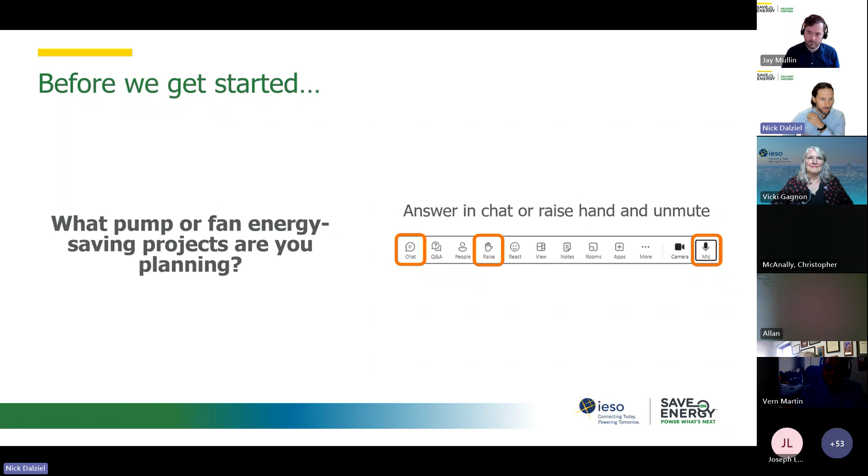As I mentioned, today's webinar is on estimating project savings. This particular webinar is focusing on pump and fan systems. My name is Nick Dalziel, I'm an energy coach at Wolfen, and I'm excited to be here talking about this. I've been working on pump and fan system energy savings since my very first job out of university, and that's actually where I met Vern Martin, a storied expert on fans, who is going to be my co-facilitator here today. I'm going to be taking us through the training portion of today's webinar, and Vern is going to lead the Q&A in the second half. Vern, do you just want to say hi?

Hey, can you hear me okay? You bet. All right, perfect. Good to be here and nice to see the group here. Is my video working okay, Nick? All of a sudden I got a thing that flashed up, said it's not working. How's it look, Jay? I can't see people's faces, it's a little bit frozen at the minute, so maybe try turning that off and back on, but the audio is fine.

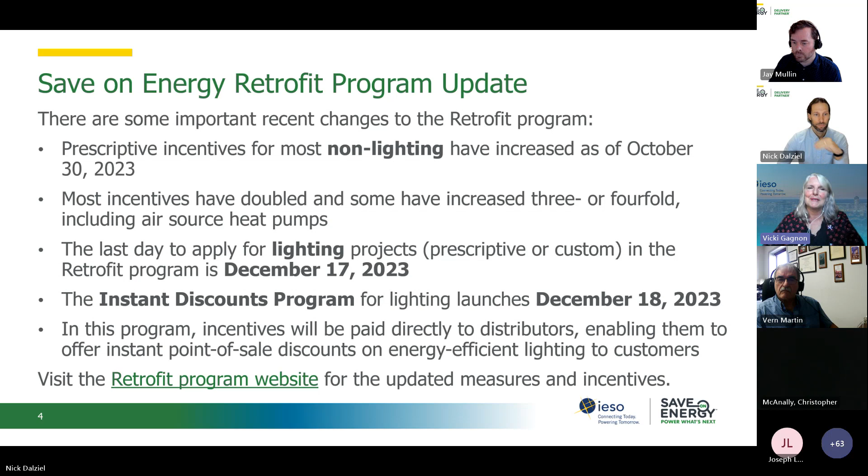And secondly, the last day to apply for lighting projects in retrofit, both prescriptive and custom track, is December 17th. And the instant discounts program for lighting launches December 18th. In that program, incentives are paid directly to distributors, enabling them to offer instant point of sale discounts on energy efficient lighting, so that you can purchase already discounted lighting from participating distributors without any paperwork on the part of the customer. You can find more information on all of these changes on the Save on Energy website. And with that, I'll turn it back over to Nick and Vern.

Great, thank you Vicki. All right, so today's webinar, the training portion, is going to follow a 3-point agenda, starting with pump and fan fundamentals, including types of pumps and fans, pump and fan curves, basic principles and equations for understanding pump and fan operation. Then we're going to move into estimating pump and fan energy baselines.

This will include some more equations for calculating power and incorporating load and duty factors when developing your energy baselines. And then we'll move into estimating pump and fan project savings, including a look at the fundamental mechanisms of savings behind these projects with pumps and fans, typical opportunities and solutions, as well as calculation pitfalls to avoid. After that, we'll move into the Q&A with Vern Martin.

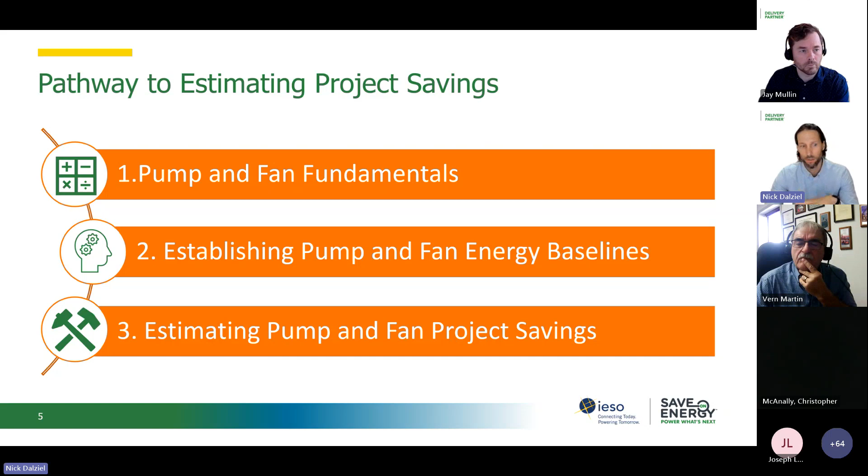Understanding some pump and fan fundamentals is critical to understanding how to calculate energy savings. The expectation of this audience is that you know these fundamentals, so this first part is intended to be a refresher and it's going to move pretty quick. The participant workbooks have additional materials and references—some of my favorite go-tos over the years—so if some of this material is new to you, please check those out.

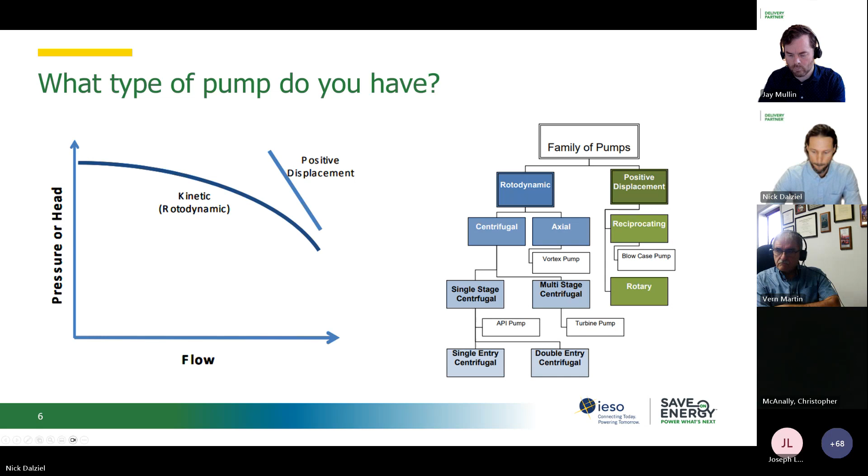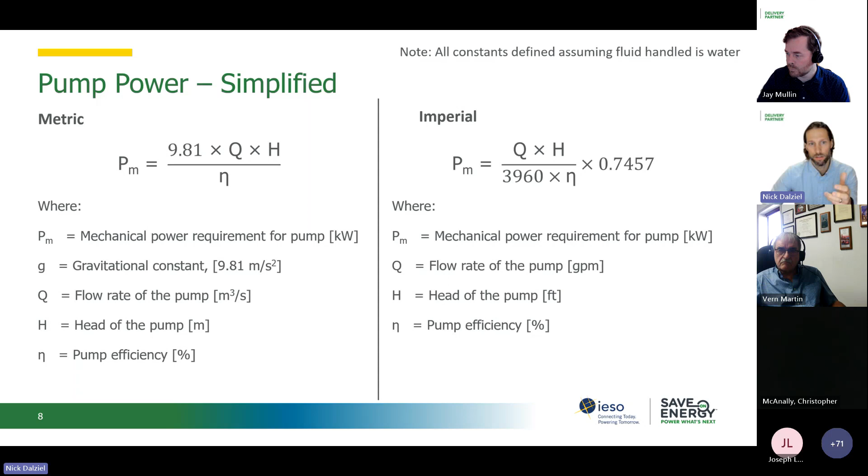Here you can see the pump equation, or the pump power equation—we've got the metric and imperial equation shown here, also in the participant workbook. This can be simplified when dealing with water in particular; you can see the simpler version of the equation here. The important takeaway is to understand the relationship between flow, pressure, pump efficiency, and power. So you can see what's on top of the equation—flow and pressure—divided by efficiency. This will become relevant when we talk about how to improve the efficiency of systems, how to save energy, and how to calculate them.

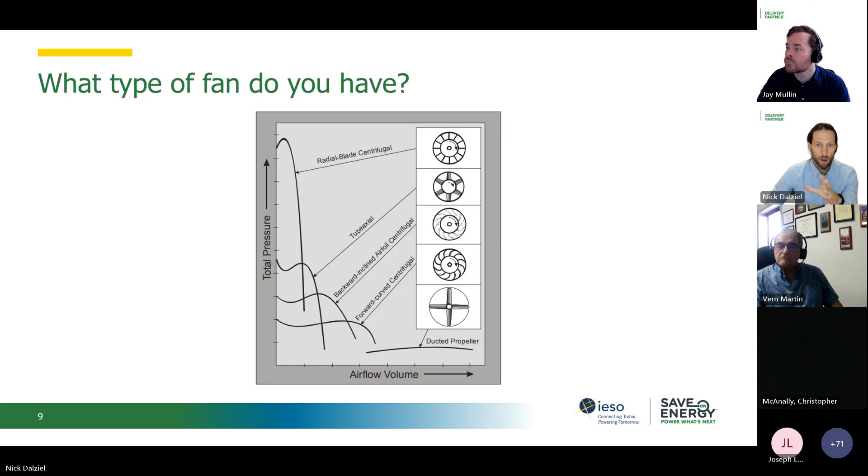Moving on to fans, this image shows how different the various types of fans are. Pictured are five types of fans, ranging from high pressure, low volume with radial blades centrifugal, to the other end of the spectrum with ducted propeller fans—high volume, high airflow, low pressure. All the content we're covering today is applicable to all these fan types.

So those are the types of fans and pumps. Now we're going to move on to talking about the systems in which they operate. A pump or fan will always operate at the intersection of the pump or fan curve and the system curve. The system curve is the relationship between pressure and flow, including the static pressure or lift, as well as the friction generated by pipes or ducts and any restrictions as the flow increases.

The system is going to look different for each different system, and depending on whether you have a fixed resistance system versus a fixed flow or fixed pressure system. Again, I'll refer you to your participant workbook—if this is new content for you, I've referenced a couple of good guidebooks developed or sponsored by the IESO, as well as other utilities across Canada, that break this down to fundamental levels with plenty of illustrations so these concepts can be quickly grasped.

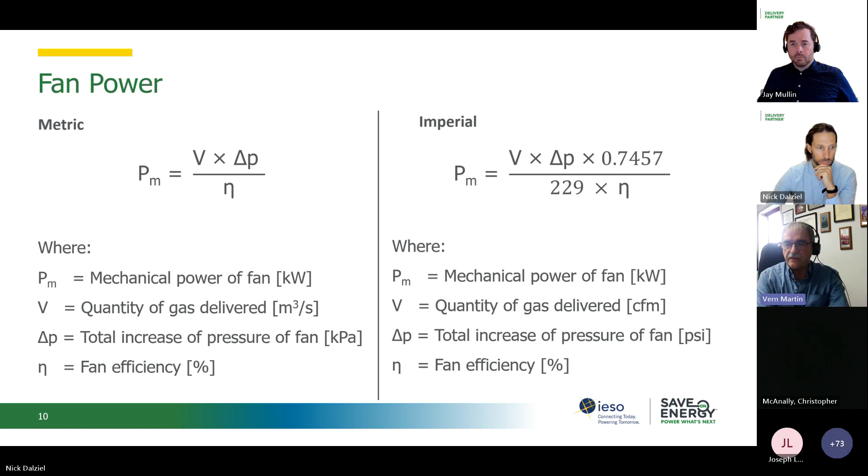I think you said it about exactly right. I would perhaps add that turbo blowers don't behave that much differently than any other kind of high speed, high pressure fan, but there definitely is a consideration there that all of a sudden compressibility starts to become a more major factor. It always is a factor, but at under 20 inches water gauge, we normally disregard it just because the impact of compressibility is not that significant. Above that, you do have to take it into consideration. You have to remember that fans and blowers are thermodynamic machines in a sense, and of course you have a lot of heat that gets generated once you start to compress flow, and so that is a factor. Beyond that, I think you'd have to look at the specifics of what equipment it is you're referring to.

That's great. All right, do you have any other questions we should address now? Nope, that's all that's come up so far.

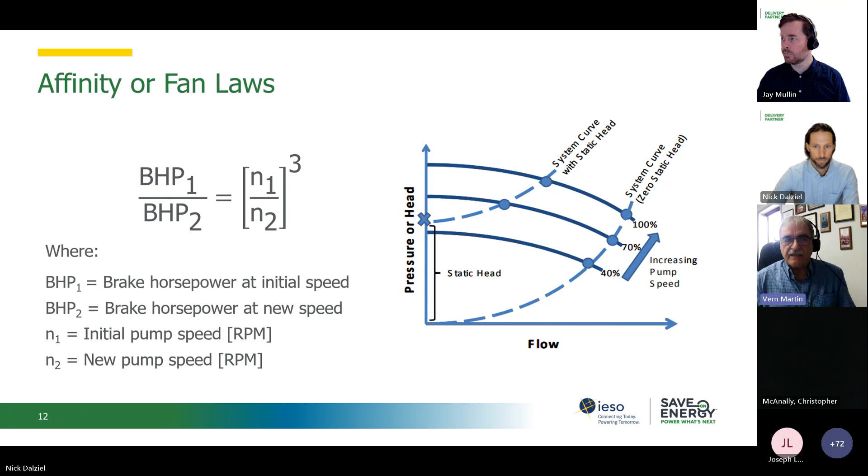It's a good additional caution. Thanks, Brent. Okay, so moving into establishing pump and fan system baselines, the premise of today's workshop is about helping you estimate savings for potential projects when you have imperfect information, to assess whether to invest more time and resources into a project.

So wanted to ask here, and get your fingers ready to hit the chat, what data do you usually have available? If you're looking at a pump or fan system of interest, just use the chat, is probably the best way to do this. What data do you usually have on hand, or can you get? And I suppose if you have three-phase power on every pump and fan in your facility, you needn't mention that because that'll probably just annoy your colleagues here.

Yeah, let me see. Nameplate info has come up in the chat. That's a pretty common one and a good starting point that I think most people are able to get. Right, yeah, okay, please keep sharing, but that's a great segue to where we're going to start here. So if you've got nothing basically other than a nameplate, this is where you can start.

The two key things I would raise your attention to, or consider here, are those two letters LF, load factor. That's kind of a catch-all uncertainty if you're estimating from the nameplate. You can either make it up based on a rough guess, 75% load factor.

But I think it's good practice, maybe you've previously measured similar systems, so you have an idea of where this system operates. Vern was talking to me just as we were preparing about just observing the motor - is it warm? That's a good indicator that it's running pretty well loaded. So the load factor is the big uncertainty there in terms of converting that nameplate into a power estimate.

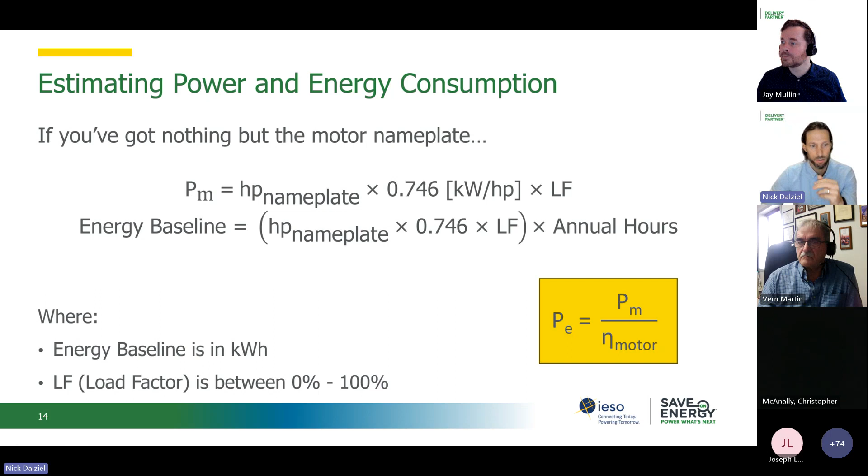Okay, going to move from there into the three-phase power equation. I think the equipment we're talking about that you're looking at in your facilities is mostly going to be three-phase power, and that's going to be where the significant energy savings are. The handout that you have gives a couple methods for calculating power using the three-phase power equation.

I guess I should back up and say that often what is, if not readily available, feasible to collect is our amp or current measurements. So that's a great place to start. If you have a load measurement, then you can use the three-phase power equation to get a pretty reliable power estimate. There are a few things you want to keep in mind.

So the voltage is hopefully close to the line voltage or rated voltage. Power factor, as long as you're above half loaded on that motor, you can pretty reliably estimate the power factor as well. And that's going to lead you to a reliable power estimate. As I mentioned, the handout has a couple of methods for working with an amp or load measurement to come up with a power estimate.

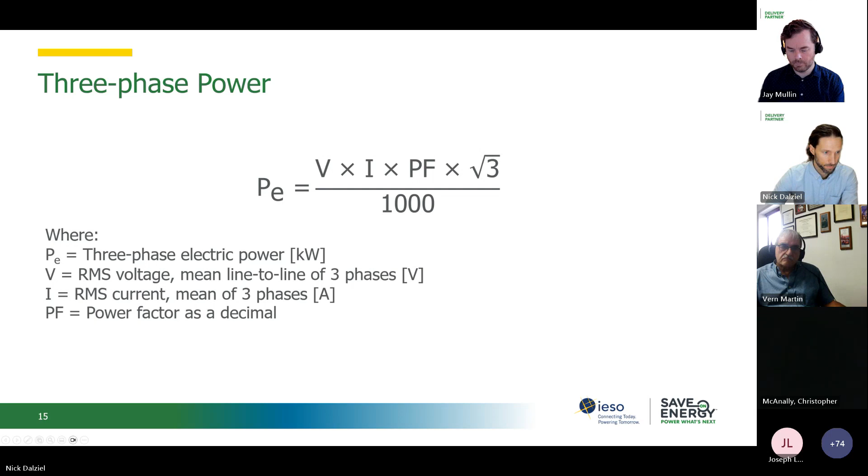Okay, so moving on to calculating baseline. Here we're introducing the element of time. If you take one thing from today's session, let it be this: you can't accurately estimate your savings if you don't have an accurate baseline.

In my experience, about 90% of underperforming energy savings projects are because of an overestimated baseline. So a couple quick tips on making sure that you don't fall into this trap.

So we've talked about how to calculate power. You can use that three-phase power equation, or maybe you've got power, or even the nameplate factor. We also covered the pump and fan equations and spoke about fan curves. Those are great ways to do a check of your power estimate, do a sanity check to see if it makes sense based on the pump or fan equation, or looking at your pump or fan curve.

So try to check your power estimates, check the sanity of those before moving forward. When introducing the element of time, this is often where things go awry. I've seen a lot of baselines and energy savings estimates that overestimate the amount of time that a system is running, or the amount of time that it's running a certain mode. So make sure to consider the operating modes of the system, as well as the duty cycle for your system, to really get an accurate assessment of how long or how often your system is running.

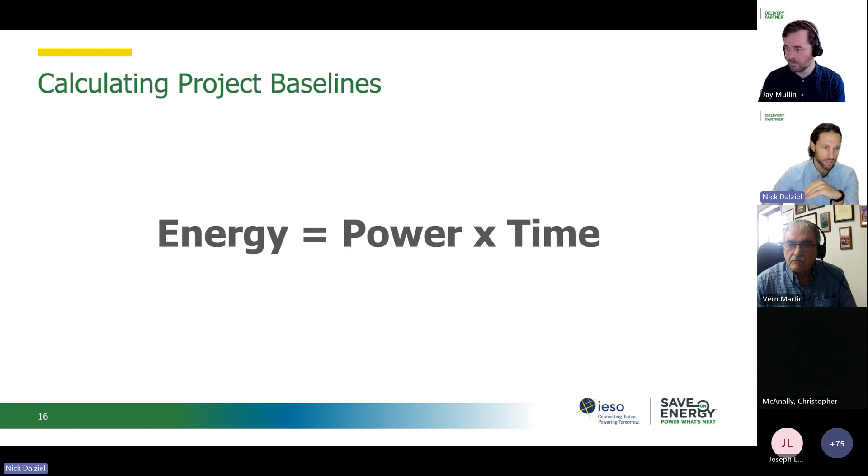All right, we're going to move into the fun part, getting into estimating savings for pump and fan systems. So the first thing I want to impress upon everyone is there's really only 3 ways to save energy with pump and fan systems. You can reduce flow, you can reduce pressure, or you can increase the efficiency.

So we kind of alluded to this when we talked about the fan and pump equations. You have flow and pressure on top and efficiency on the bottom. That's it. That's how you calculate pump and fan power. So assuming you're not going to change the density of your fluid you're pumping, it's got to be one of these 3 things, or multiple.

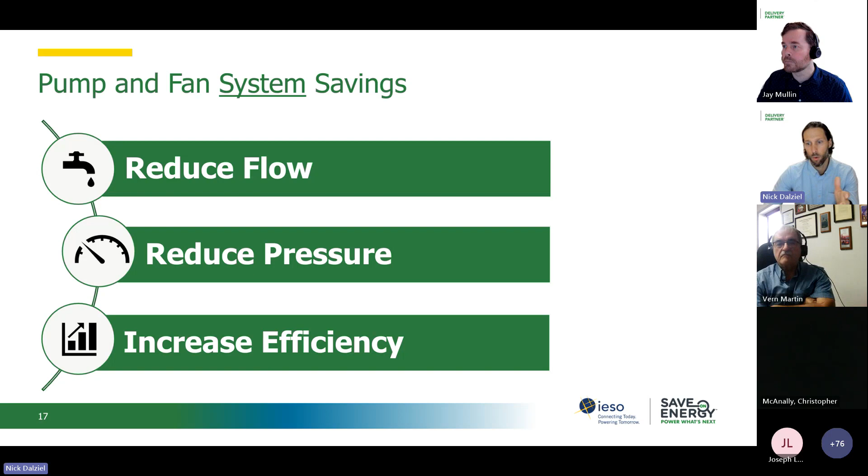So starting with reducing flow. The mechanism here is moving less volume. This could include turning pumps or fans down, as in reducing flow, or turning them off when not needed.

So that's kind of my cheat way of introducing the 4th way to save energy, which is the element of time. Don't run them, or turn the flow down to 0, you might say.

Solutions that reduce flow include eliminating a bypass or eliminating excess flow by right-sizing your system, or by introducing a VFD. Other options are on-off controls, as we suggested, or a big one is just to reduce or eliminate leaks.

In terms of calculation pitfalls, I'll go back to an image we used with the affinity laws earlier. As we mentioned, if you have a system like the one on the right, your affinity laws are good at predicting these savings. However, if you have a system like the one on the left, or the top, with a high static head, the affinity laws are not applicable.

But also, it's important to know that reducing flow in general won't have the same impact in terms of energy savings, because a lot of the energy is being used just to lift the fluid to where it needs to go.

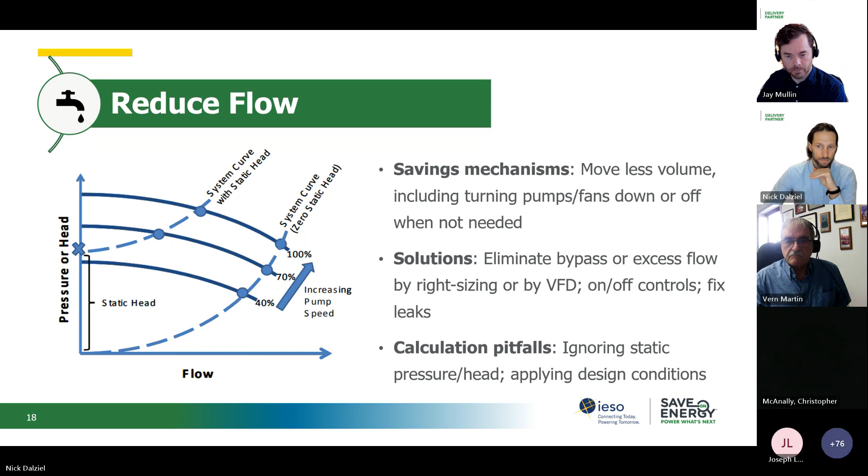Reducing pressure, the mechanism of savings behind reducing pressure would be reducing restrictions that are imposed on the system and the fluid you're moving. Those restrictions could be dampers, valves, bends, the pipe length or run, could include reducing your height or your head differentials in open systems.

I've heard of and seen examples where liquids are just being pumped to higher heights than they need to be, or exiting pipes where you could pipe it in at a lower height. Just a quick change of exit could save some energy.

Solutions for reducing pressure include VFDs to eliminate that damper or throttling, increasing your pipe or ducting diameter to reduce restrictions, and improving maintenance practices that are imposing greater restrictions, particularly over time.

Calculation pitfalls: applying the affinity laws for a system. We talked about this for different system curves. So if you're reducing the amount of restriction, you're actually changing the system curve, and you can't use the affinity law to estimate what those savings would be.

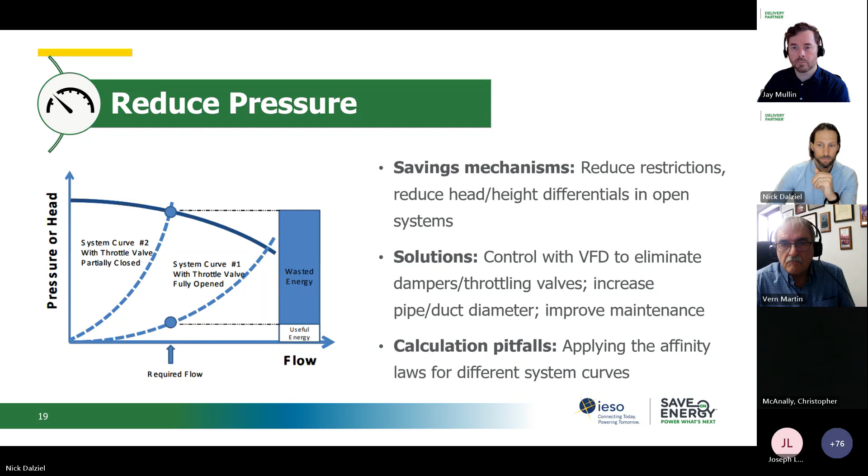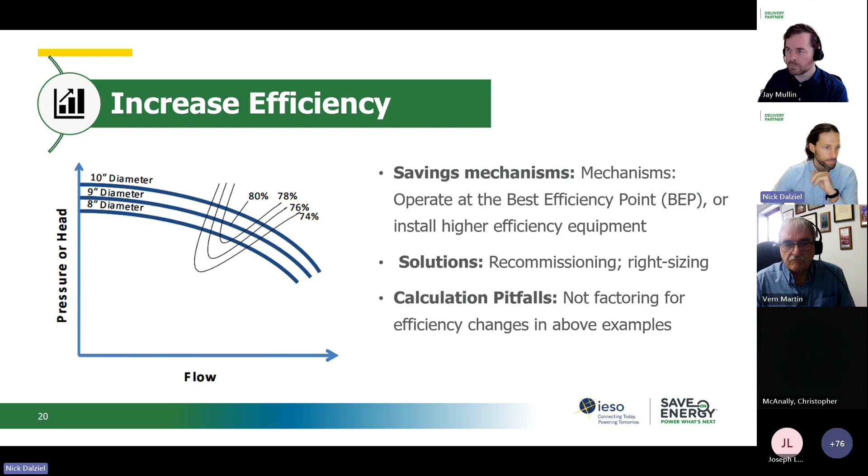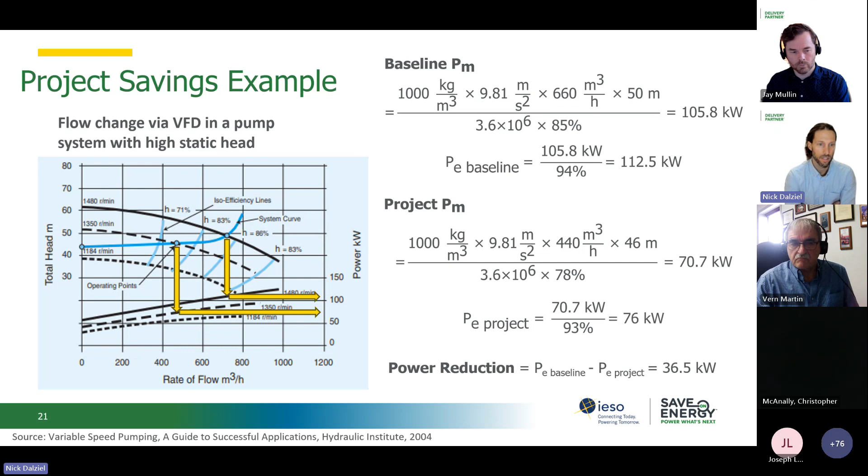So to arrive at a power reduction, we just need to take the baseline power, 112 kilowatts, subtract the 76 kilowatts to arrive at a 36.5 kilowatt power reduction. Not bad. I'd do this project.

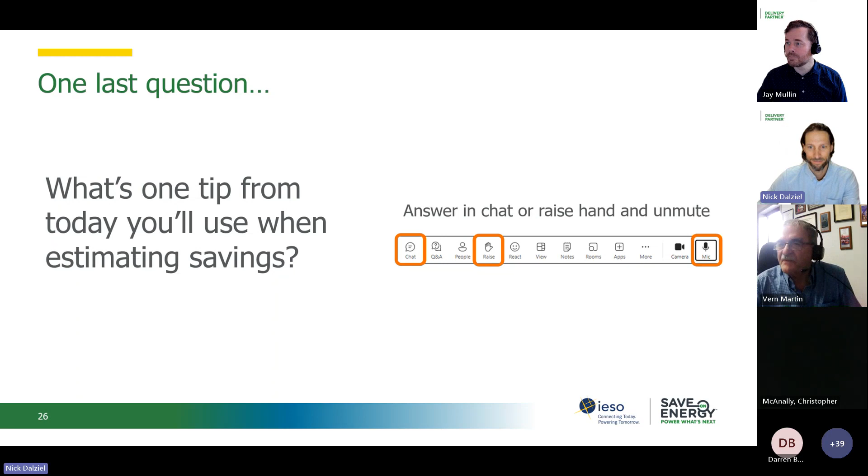You bet, thanks. Thank you, Vern. Yep, thanks Nick, thanks Jay. Thank you.